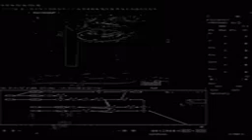Welcome back, guys. So here we're just gonna do a quick recap of what I'm calling the final portal effect.

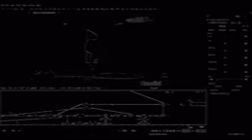And if I had more time, I'd probably spend more time rendering out point layers with a higher point count. And one of the things we didn't really discuss that much is when I would use rasterized points. So when I would rasterize the point cloud into a volume, or when I decide to actually just render the points straight up. And for me, that's usually dependent on the shot.

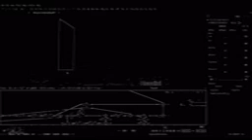So if it's a relatively wide shot like this, if I can crank the amount of points up to a level where you can't even tell that it's made out of particles, then it works fine. I'll just leave it. But sometimes you also want something to look particularly smoky and full, so then it makes sense to rasterize. And obviously if it's a closer up shot, you probably need to rasterize to make the most out of your point sim.

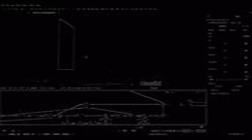So not much. This is pretty much the same as we had previously comped it with a few tweaks. So some of those tweaks, I'll pause this quickly, include the animated gain we applied to some of these layers to slightly brighten and darken some of these sims where it felt like it needed to do that. So in this case, like for example these embers, there's a subtle bright flash and then it goes dim quite quickly and then it fades off slowly until they're gone.

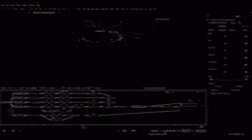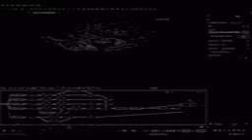And if I disable this, you can see they would have just been continuing around the room, which, you know, looks kind of cool. But I've gone ahead and duplicated that keyframe for most of these layers, and that's using the instance which I showed before. The only other thing I've done, and you can see this, the merger of all of these layers still looks pretty much the same, and it does look kind of strange, but I've written that out just as a pre-comp. So from that point onwards, I'm just loading this, because most of the magic is happening here.

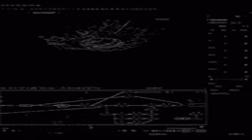Playing with levels to make sure I've got range in this point. Before I'm going anywhere near a glow, I'm actually clipping the alpha. So I've put down a brightness and contrast, make sure I've clipped white and it's only affecting the alpha. You kind of need to manage alpha for a lot of this stuff. If you're burning in or plussing a lot, you've got to make sure that you've got a consistent alpha.

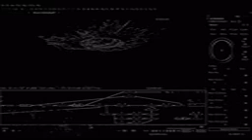And if I put my mouse over here and you look down to the bottom of the screen here, you can see my alpha value is going all the way above 1. So I keep that in check. Here I'm merging the flakes on, and then we come in with this three blur glow, which gives me a very soft glow.

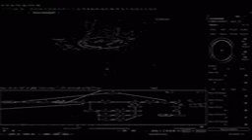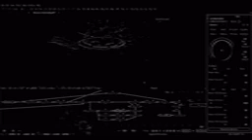And the whole point of that for me is to do a glow that I have so much control over that I can make sure that you can never see the edge of one of these glows. So I never want to see something like that. It's actually very subtle. It looks quite strong on black, but in the scene it's mainly a sort of soft grade, but it makes a big difference.

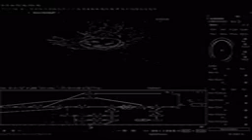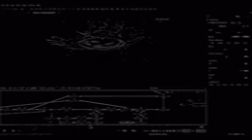And then some final contrasting, and I'm displacing itself. So I have this sort of gamma up value here, clipped white, and I'm plugging that into displace, and if I disable that, you can see it's just displacing outwards from this area. So that kind of helps make it feel a bit more magical, and it helps with the points, because here it looks quite particulate, and this could help sort of merge everything together. And if you go really extreme, it looks pretty freaky.

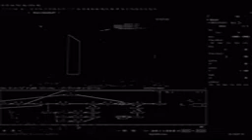And then I've taken the environment render and used that to manipulate the color of our darker points there, just to help with the integration. And I think that works pretty well as well. For the environment, it's the same as it was. I have a few resizes here because some of my layers I forgot to render full res. I have a subtle glow. So I didn't go for my full glow setup because I just wanted the door to bleed a little bit.

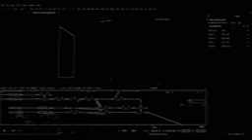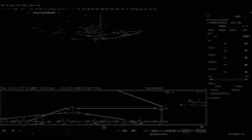And then, like I said, I've copied that brightness and contrast keyframe, just so that the light also quickly goes brighter and then fades off when the rest of the portal fades off. And then the biggest thing which I added is to take the portal and put the same kind of displace affecting the environment before I merge the portal on.

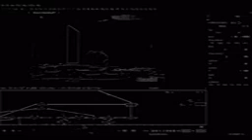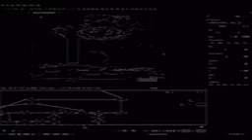So if you look here, that's adding that refractiveness, which is so much in the magical effects stuff, especially from directors and clients, they want to see the effect warp the environment slightly, and it works really well, especially with this mode. In Nuke, I haven't found something as good as this, so I'm still on the lookout, but this is just perfect. So you can see if we look at the full image now, we do have pretty much the full top half of frame covered in this blue magic.

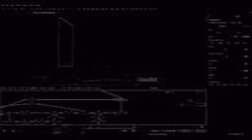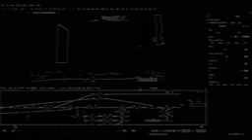And if I disable this displace, you can see how everything shifts slightly behind the portal, and when I play it, it leaves like this interesting rippling effect here. So the subtle bending of this environment here from that displace is kind of really effective. And that's it. So nothing too complicated going on here. It's just basically bringing these layers together in a way that's useful, and then just tweaking those values and colors until it looks right.

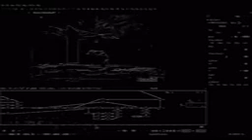There's so many ways you can go with this setup as well. As I showed before, just brightening up or dimming down one or two of those layers gives a completely new type of effect. So even if I take my pre-comped layers here and I look at the final image and I come back before the glow, I can knock this right back, and that's much more subtle, a bit more naturalistic, and something like that is probably what you would see in a live action feature film.

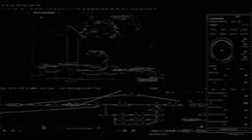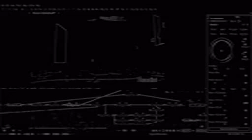So they don't go for so intense; in most movies where it's well done, it'll be something like this where there's maybe one element that's super intense and everything else is kind of dull, but it works because it's sitting on top of a background that's just completely uninteresting. So that's kind of the realistic looking portal. I have a habit of over cranking everything, so my final version looks like this. And obviously there's places you can go beyond that as well if you want to get ridiculous.

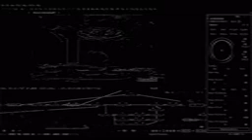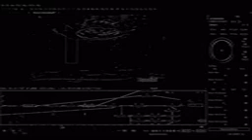You can see that background layer of points that we made in SOPs is playing a huge part in merging this whole portal together. So if I just put the gamma up, you can see loads more going on. And maybe less saturated, maybe more. So lots of range, lots of options, especially if you come all the way back here. And I mean, it's pretty much got everything we need from Houdini, and the rest of the art making process can happen in here.